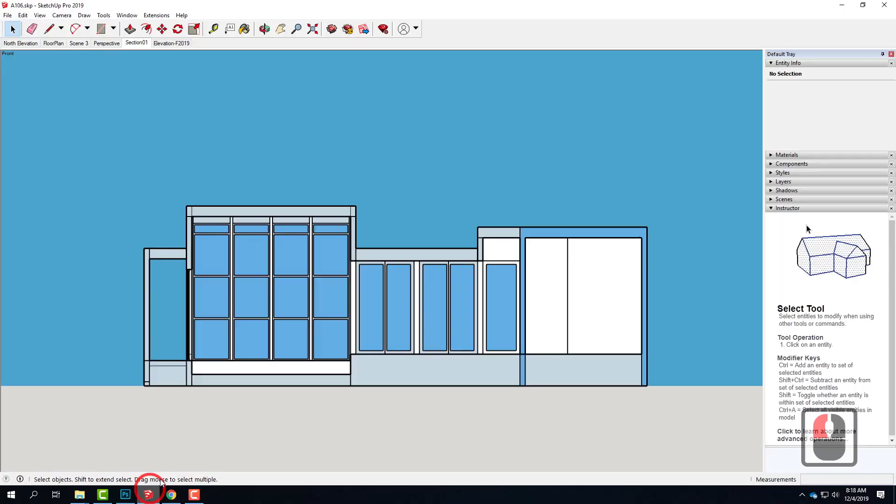So I'll do this a couple times with a couple different images just so you can kind of see how it works. In this scenario, we want to find the image first, or take the image if we went to the site, and then go to our SketchUp file. Let me switch into one of the perspective modes here.

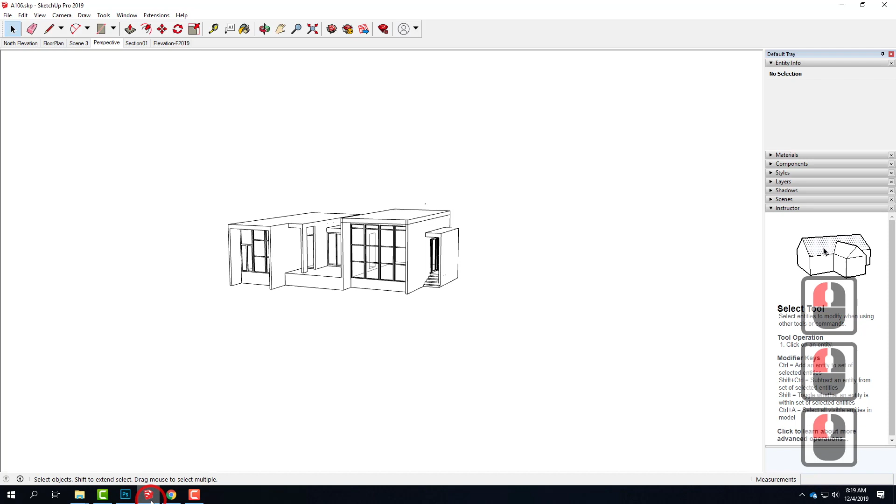All right, so I'm in perspective mode. I'm going to go into camera, make sure that I'm set for perspective. That's good. And I need to think about what this is going to look like in relation to the image that I have. So you end up flipping back and forth. There's my image, there's my SketchUp, and I'm going to go back and forth as I work through what they would look like.

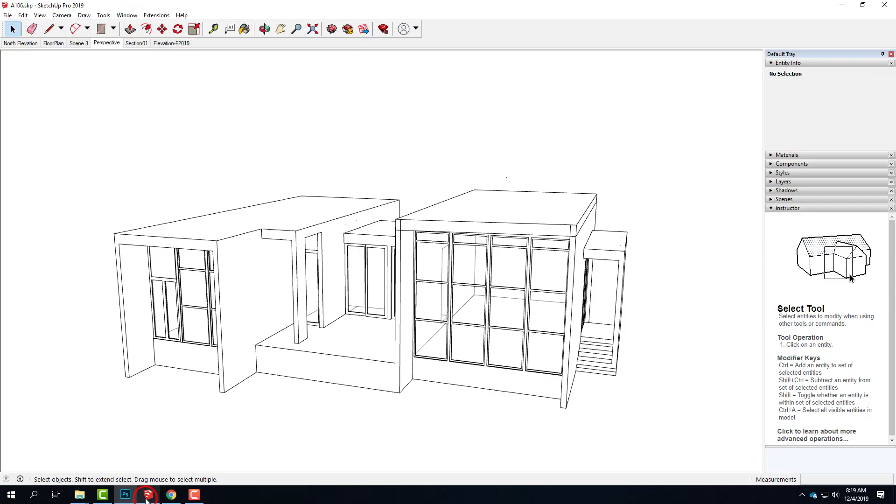Now the problem with SketchUp is frequently people take a perspective that's too high. They look at the building like this, and when they go to put it into their scene, it doesn't match up. The eye line doesn't match up. So it's really important to get yourself down into the correct eye line such that the horizon line is in the right spot. SketchUp has a built-in tool that can help you with that.

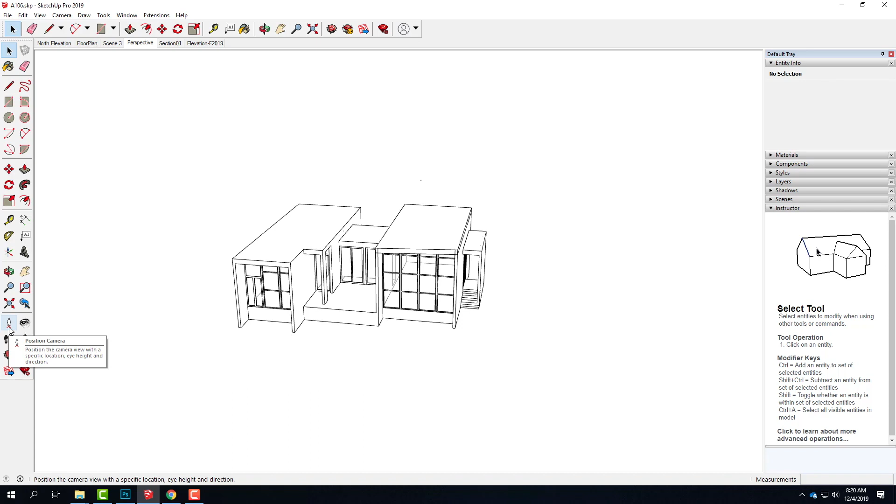It's available in the large tool set. So if I went to my View menu, and I went to Toolbars, and I checked the large tool set option, down here they have a position camera tool. It's a little person with an X below it. What that position camera tool does is if you click on it, it allows you to say, if I was standing here looking at the building, what would it look like? It kind of forces you down to an eye level perspective, which is a really nice way of looking at it. Right after you use that position camera tool, you get this little eye tool, which is the look around tool. That can help you orient your building to the site, etc.

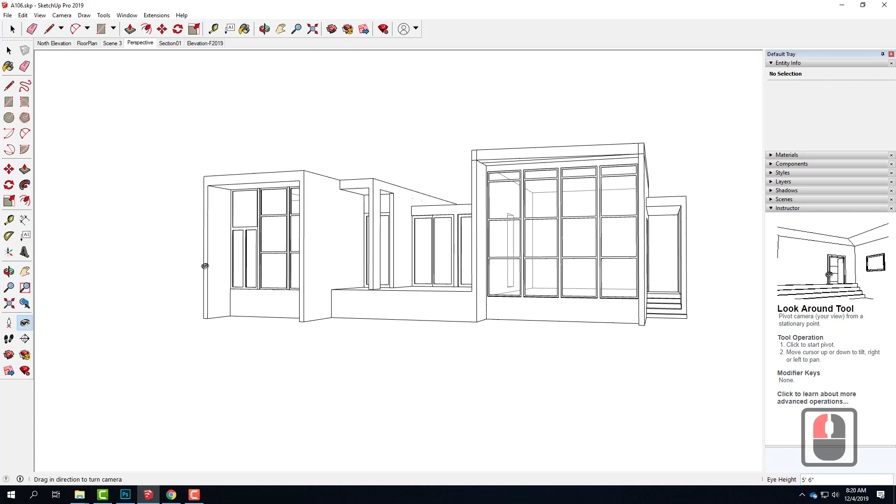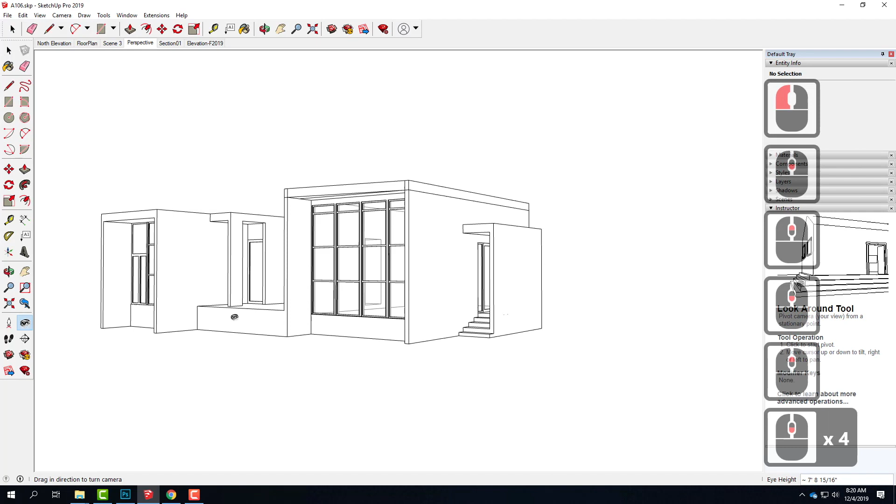So as I'm looking at this here, and I go to look at my building, okay, I'm a little bit further away if I wanted it to be parallel kind of in there. So I'd have to come back, maybe zoom out a little bit, zoom over a little bit, maybe. There you go. So you kind of have to keep working at it a bit to get where that feels about right. So somewhere right about in there, and you can flip back and forth. So that feels about right. It feels like it would sit into the scene about right. My eye level feels about right.

Oops, sorry, wrong one. It needs to be down just a little bit more. Maybe about there. So I tend to just flip back and forth like this until I feel like, okay, that feels like it would sit in about the right perspective.

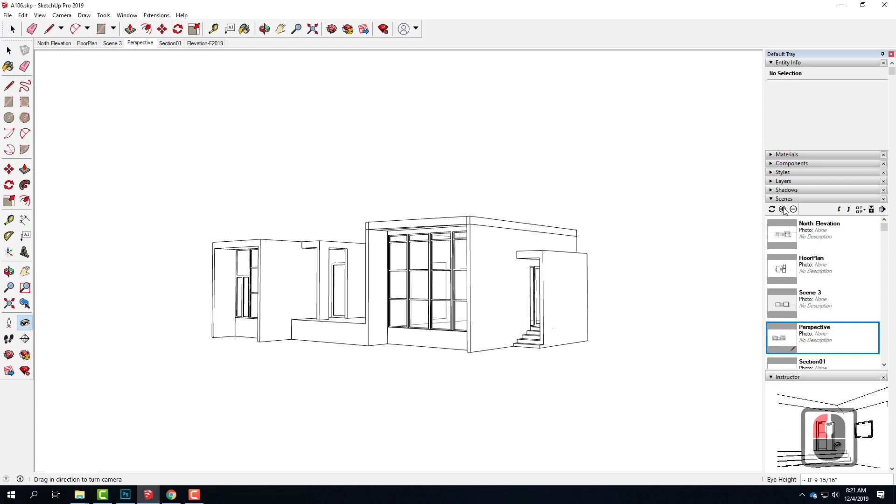At that point, I'm going to take the scene here, and I'm going to save the scene. I'm going to rename this particular scene to be perspective 2. That way I can come back to it. I would do the same thing for one of the other views. Of course, you only have to do this once.

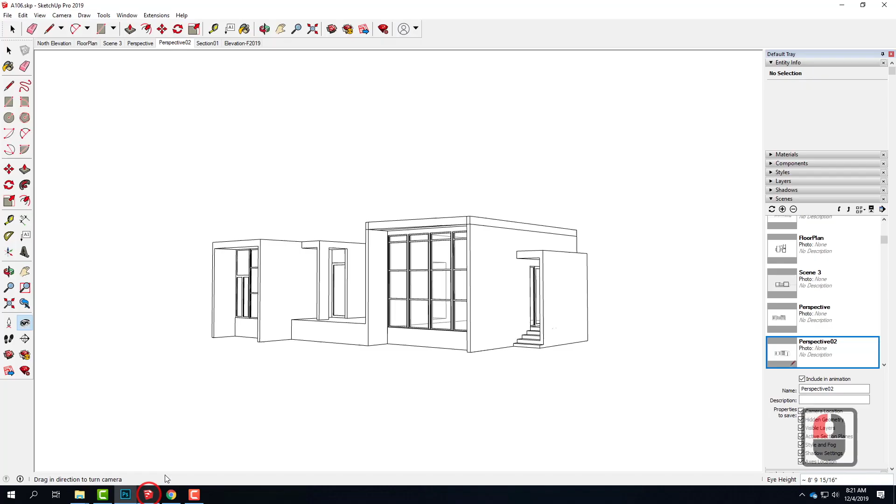But let's say I was working with this particular image, and I wanted to align it to the path. That perspective is going to be different. So in this case, it might even help to get yourself out a little bit. Use that position camera tool again. Position the camera, say right about there. Use the look around.

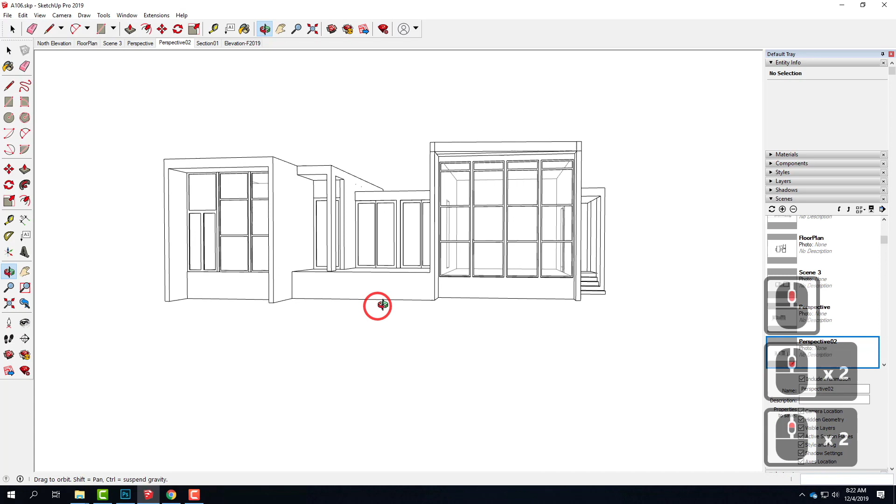Something like that. Nope, I'm too far over. So we'll orbit the model a bit. Maybe like that. I'm thinking about where that path is and how that's going to line up with this path here. So I'm constantly going back and forth trying to sort that out.

You know, it looks like maybe this needs to go down just a bit. Go back to that look around tool. Sink that just a little bit. And so maybe it's about there that it needs to be.

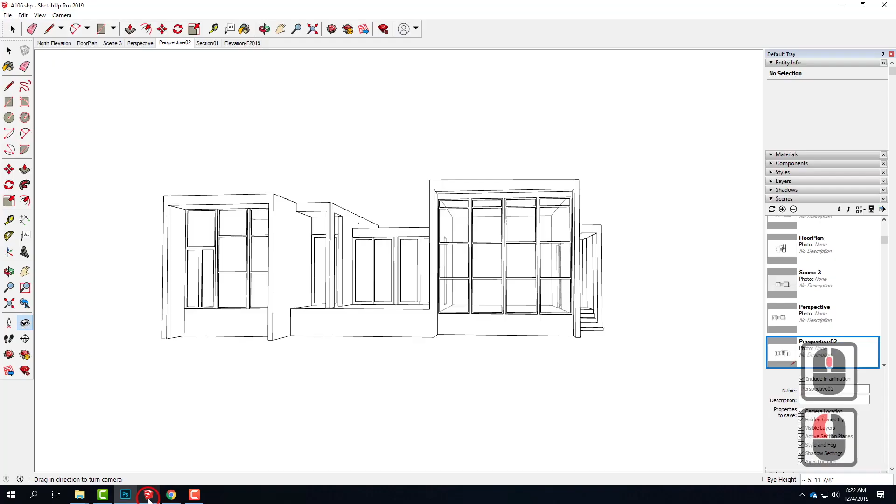So at this point, I'll go ahead and save this scene again. And we'll call this perspective 3. And so I'll go ahead and export the lines and I'll see what they look like in the scene to check if the perspective lines up correctly. So this first one, I would go to File and then Export 2D Graphic. Let me get to my folder for today.

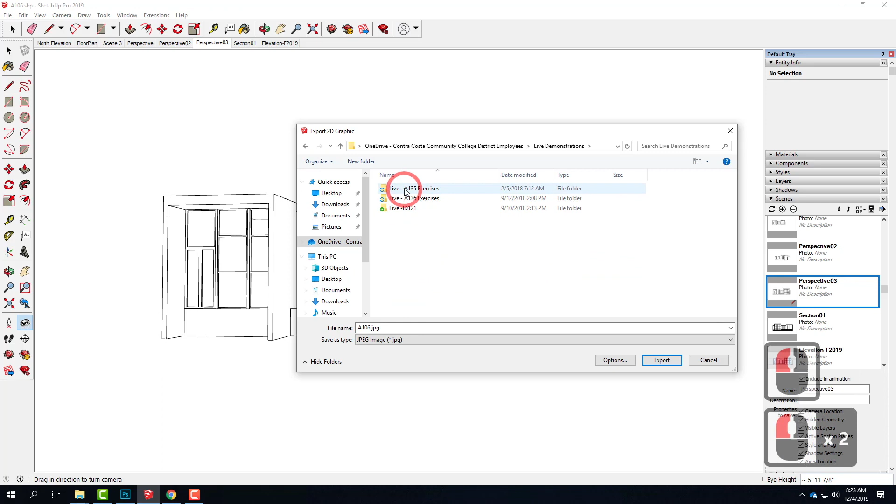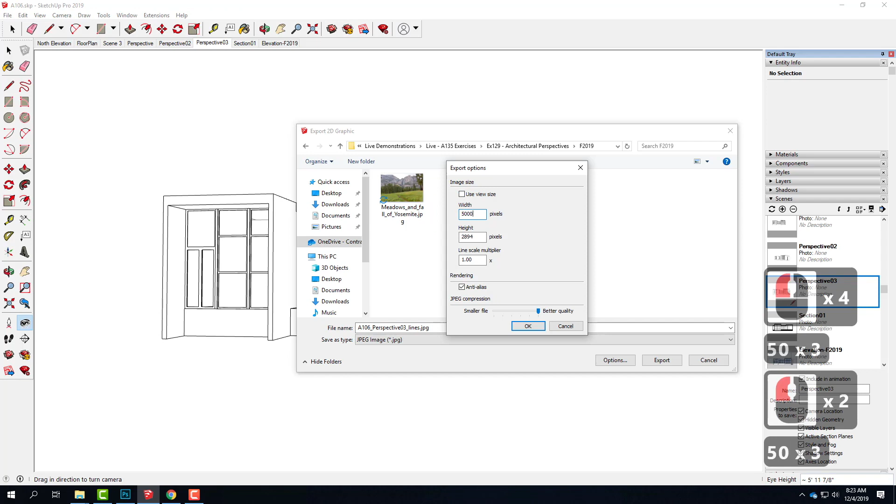I'll call it perspective 3 lines. Under my options, I'm going to change my size. We'll go up to 5,000. Oops, uncheck the use view size.

There we go, and I'll go ahead and say OK. And then export. I'll then jump back over into Photoshop. Here's my image. I'll go to File and then Place Embedded.

I'll take that perspective and place it in the scene here. I may temporarily make it transparent, so I might adjust this opacity down so I can see through to my building. The other option would be to change the blending mode so we see it there. This is a little harder to see, so I'm going to use normal with some opacity because I think you'll have an easier time seeing it on screen.

Then it's a matter of positioning the building, saying okay, there it is, lining up on the stairs. It looks like the stairs kind of come through. All right, that feels about right in position. The size is about right. Let me switch this.

We'll commit to it, and then I'm going to take this layer here and go to multiply. It's a little hard to see until I cut it out. Let me go back to normal so you can see it.

So I can start working with this, I can start cutting it out. I need to obviously do the mask, etc. And I'll come back, but this perspective seems appropriate for the scene. It seems to fit. Now on this other one that I was working with, we'll check and see how that one plays out.

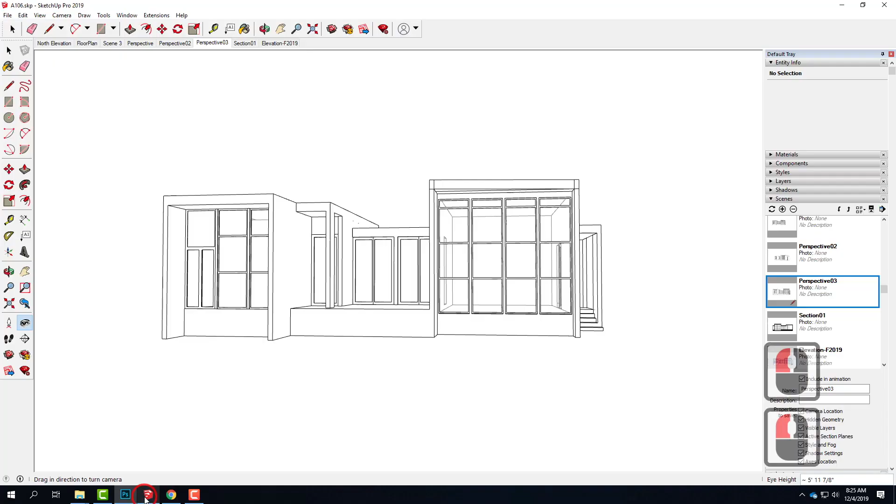That's why I have these scenes saved, so it's easy to jump between the two scenes as I decide which one looks right. So on this one, I'll go to File and Export 2D Graphic. This was perspective 2 lines, and I already have it set at 5,000, so we'll go ahead and export it.

I'll jump back into Photoshop here. I'll go to File and then Place Embedded. Perspective 2. Let me adjust that opacity here, and we'll pull this one down.

It would probably work, but I don't think it's as good, and I don't think it's lined up. I think the building has to twist just a little bit more. It might also have to be a little bigger. Oops, I always forget and hold down Shift here. Let's make that a little bigger.

Tuck that in. I think because of the hillside, this one gets a little tricky. It looks a little too high here, and a little too big there. So it's not quite the right perspective, but this is part of the challenge. That's why I wanted you to see me work through this to decide which one's right. I'm going to stick with this one because it lined up pretty well, as opposed to this one, which didn't quite line up as well as I wanted.

So now here's the trick. On this one here, you already saw that I brought this in. Lining this up with the other exports is going to be a bit challenging. So I'm actually going to go back to opening the lines version, and then I'll bring in the background the way we've done it with the other ones. So let me go back to my SketchUp.

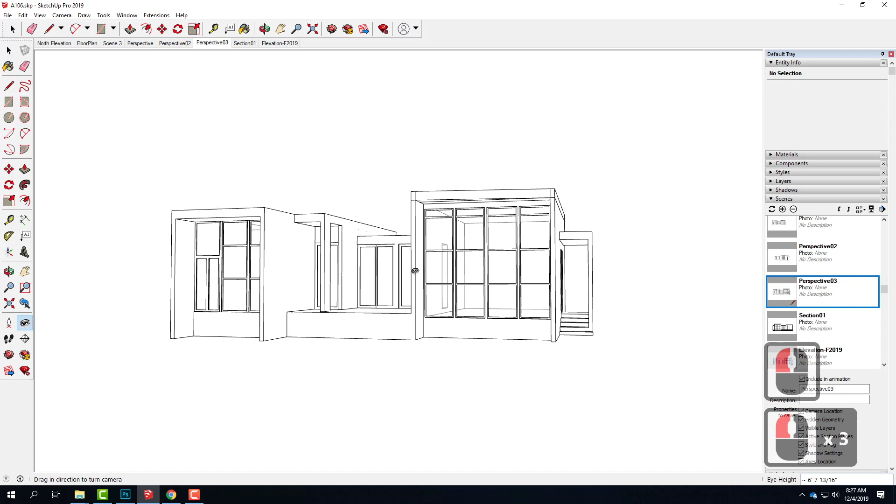I'm going to make all my exports. I'll go to perspective 3 because that's the one I'm going to end up working with. I'll go to File, let's see here. We need to turn on—we'll take a look at the X-ray view and see if that is good.

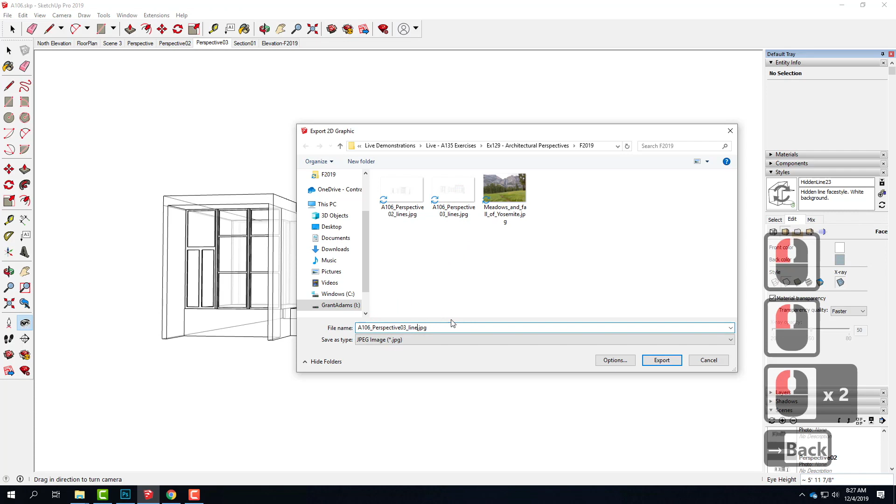Let me go to Edit, Face settings, we'll go to X-ray. Yeah, it might be okay. I'll export it anyway. I'll go to File, Export 2D Graphic. Wait, this was perspective 3, and this was X-ray, and so we'll export that.

I'll turn off the X-ray. Now I'm going to turn on the shadows. So I'll go to View, and then check the box for shadows here. I may adjust the shadows, time of day and time of year here.

So let's see, here's shadows, time of day, time of year. The temptation is always to make this look the best that you can, but in reality, we need to go back to our scene here and take a look at the shadows.

Where are the shadows? This is a pretty high noon setup, so the shadows would be pretty vertical. It also appears, yeah, we can look right there—there's a shadow on that side. So there'd not be too much in the world of shadows for us to see in here. We're actually seeing a lot more shadows than we really need to see. Let's see if I can adjust that a little bit. It's going to be about that angle, and we'll go back a little bit.

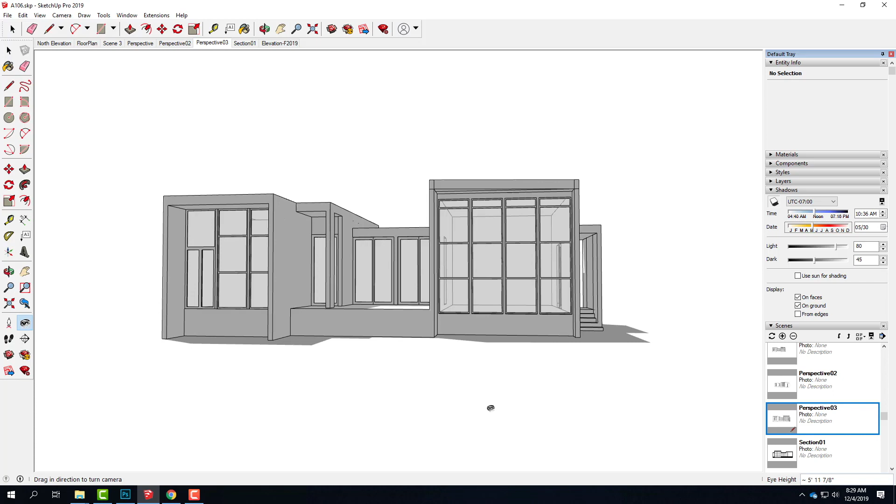All right, I'm just sorting through. We might be getting a little too much shadow here, but it'll probably work. The alternative would be to change the orientation of the building and rotate it around, but I don't want to go through with that right now.

So I'll export the shadows, but before that I want to make sure on my styles, I'll go to the edge settings and turn off edges so I get just the shadows. With just the shadows selected, I'll go to File and then Export 2D Graphic. This is going to be the shadows, and we'll export that.

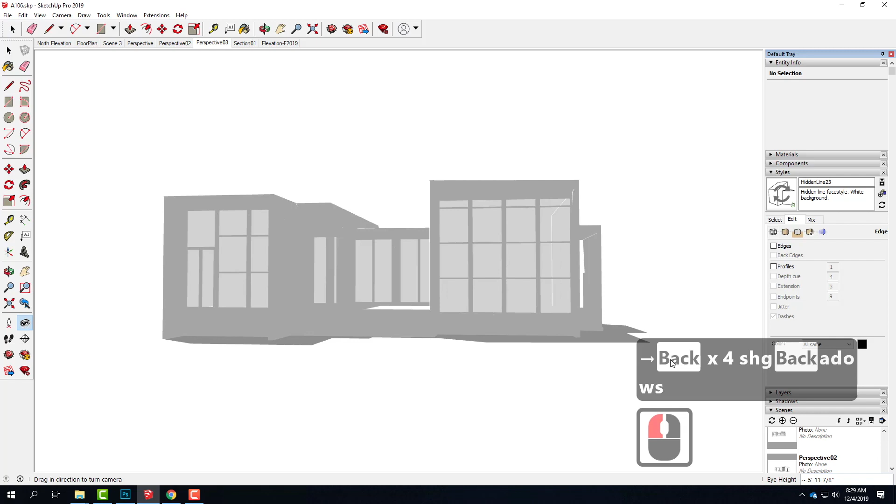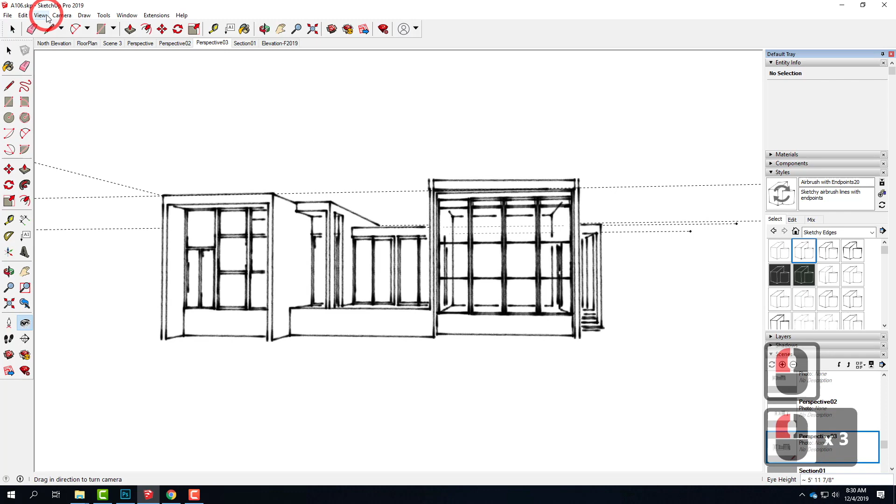We could turn back on our edges. I'm going to turn off the shadows, so I'll go to View and uncheck Shadows. Then I'll go into my styles and select the sketchy edge styles, using the airbrush with endpoints. I need to turn off my section cuts, section planes, section fill, and guides, so I have just the airbrush on. I'll go to File and then Export 2D Graphic.

And we'll call this one Airbrush.

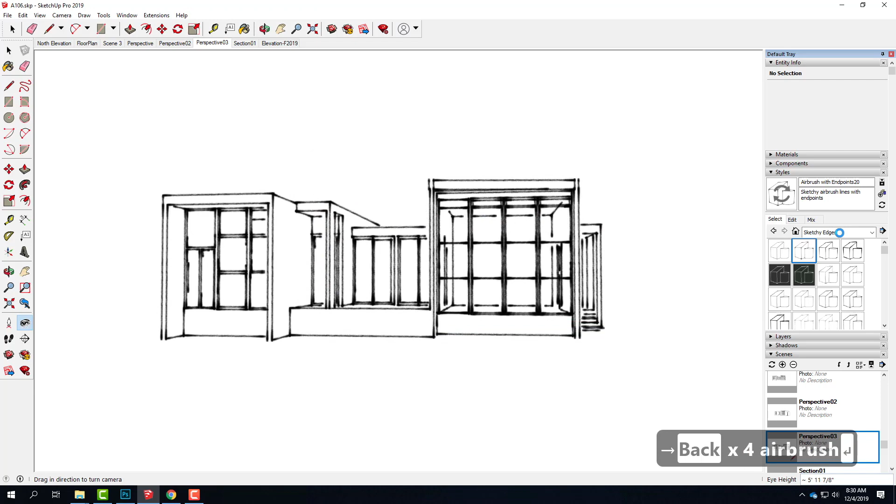And the last one that I did was the pen. Let's see if I can find it here. There's the pen gray. Actually, I had good luck last class with the pen black. So where's the pen black? There's pen black, a little bit darker.

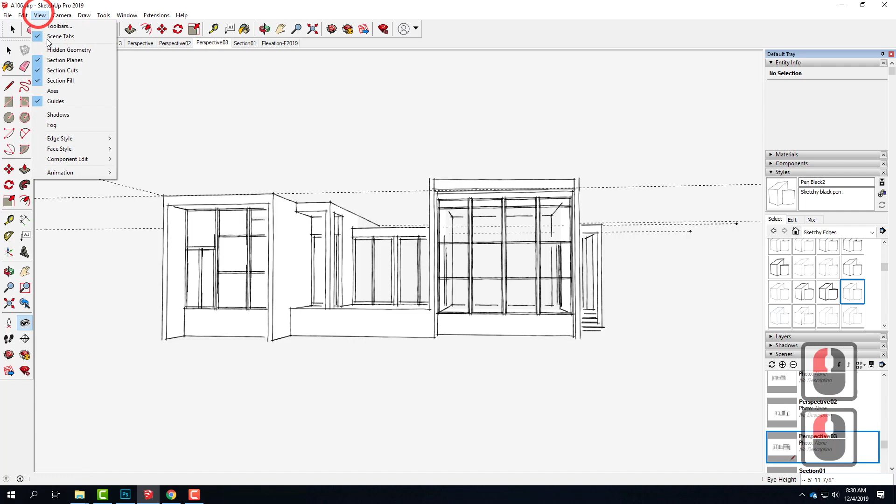I'm going to go to View and uncheck Section Cuts, Section Fill, Guides. There it is. I'll go to File and then Export 2D Graphic. And this one is going to be the lines. And then I'll export.

Oops, sorry, no, this is going to be the pen. Apparently I'm still asleep too. And then export.

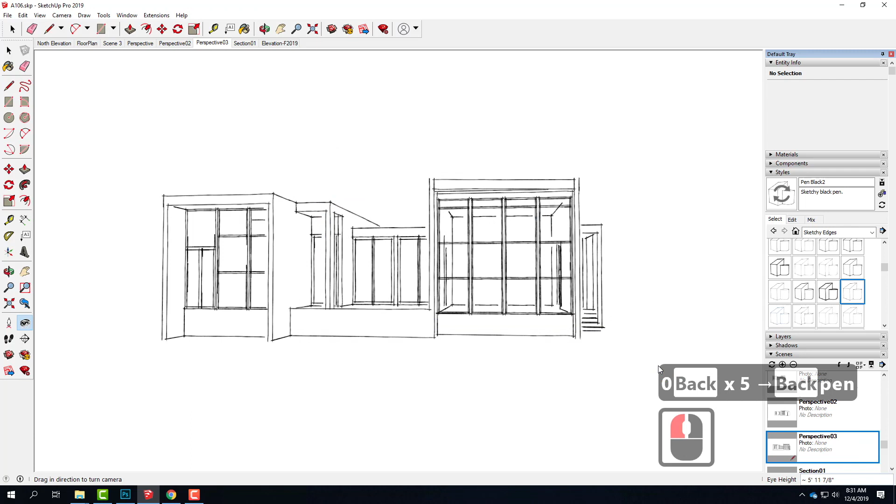Excellent, so I've done those exports. I'm going to jump back over into Photoshop. Remember, I'm not going to place them all into here because lining them all up is going to be challenging. Instead, I'm going to open the first one, which would be the lines version, and bring them all in here first.

So I'll go to File, Place Embedded, and bring each subsequent one in. The next one was the X-ray. We'll commit, File, Place Embedded. Next one was the shadows. Place, commit, File, Place Embedded. Let's see, next one was the airbrush. Commit, File, Place Embedded. And the last one was the pen. Perfect, so I have all of those in.

I'm going to change the blending modes on all of these. I'll hold down Shift, select them all, and change the blending modes to Multiply. Now we're seeing through and seeing the building as a whole with the shadows, etc. So I have that in place.

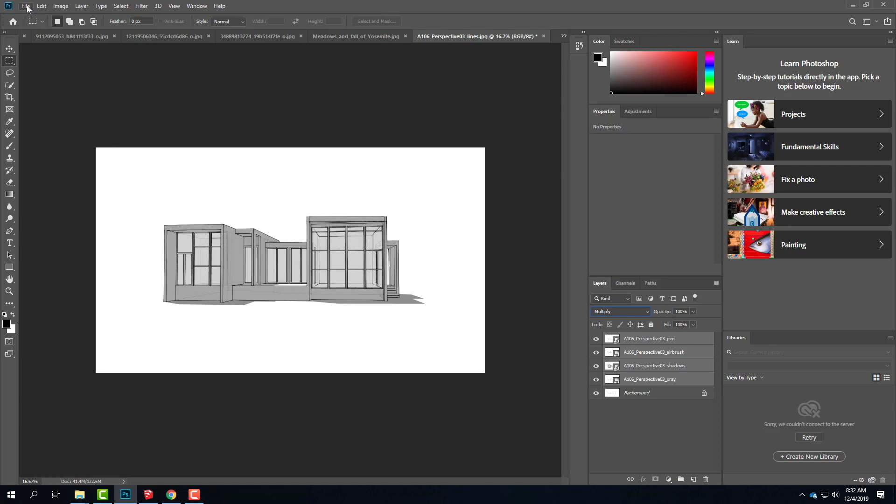Now I need to bring in that image. I'm probably going to need a larger canvas size, but we'll get to that in just a second. I'll go ahead and go to File and then Place Embedded, and this is going to be the background image. That was in one of my previous folders here.

Let's see, it was in last fall. Yep, there it is. We'll place this. Now this time I'm going to make this image large enough, so I'm kind of doing this in reverse order. I'm going to keep making this image bigger, and I might need to switch this into Multiply mode or even just change the opacity temporarily so we can see it.

I have to make sure that my path is going to line up with my building, so it's something about like that. Maybe this is a little bit larger here. All right, that seems pretty good. Call it right about there. I'll go ahead and commit to it.

Notice that I lost a lot of the image. So this is where I can go to Image and then Canvas Size. I'm going to peg this corner this time as my anchor because I don't need to get bigger there. And I'm going to make my height bigger and my width bigger so that I make sure I get the whole image.

I might need to make my width even a little bit bigger. So let me go back to Image and then Canvas Size. We'll put the anchor on the side here. We'll make my width 60, making sure I get everything.

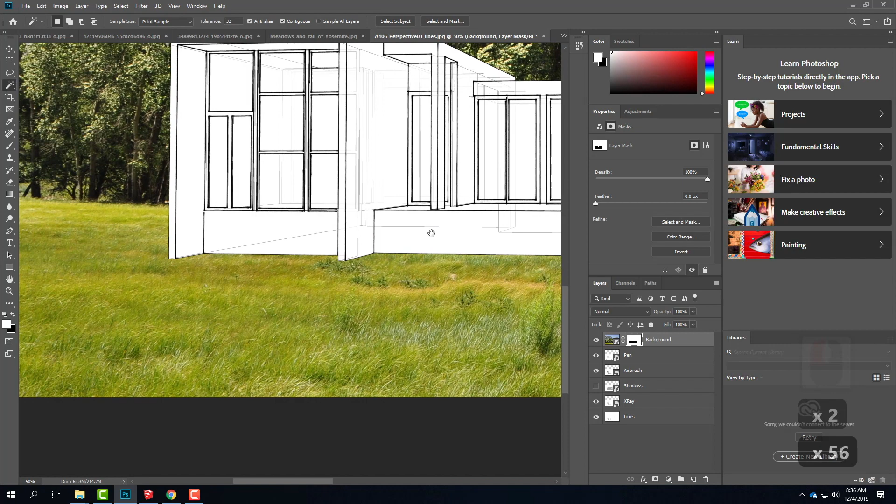But in the front here, we haven't dealt with how the grass overlaps the scene. Right now it's just a nice, stark, chopped line, so we want to make an adjustment there. I'm going to do that by copying a piece of the background to work with. We did this way back when, probably exercise 108 or 109 or something like that. Make sure I'm on the background here—we took and copied a piece of that background. There it is. I'll go to Edit, then Copy, then Edit, then Paste.

And it gives me just a piece of the background. If I were to turn everything else off, we'd see that there's just that piece of the background. I'm going to cut out that background piece—let me keep that one off for a second—for the part of the building that I need.

So let me use my Magic Wand tool. I'll select the outside—oops, on the lines there—I'll select the outside of my building. There it is. Then I'll go to Select, Inverse, so I've selected the inside of the building. I'll go to this piece and press the Delete key to cut that out. So what I'm left with here, if I turn off my lines for a second, is essentially a cutout piece of grass for where the edge of my building is. That's what I'm looking for.

We can now use the clone stamp to make that edge blend in a bit. So I'll use the clone stamp tool—let's hope today it works for me. I'm going to load in the legacy brushes, so I'll click on the little gear icon in brushes, and click on legacy brushes. Under legacy brushes, it's going to be under the default, about halfway down is going to be the grass brush. There it is—I'm going to select that grass brush.

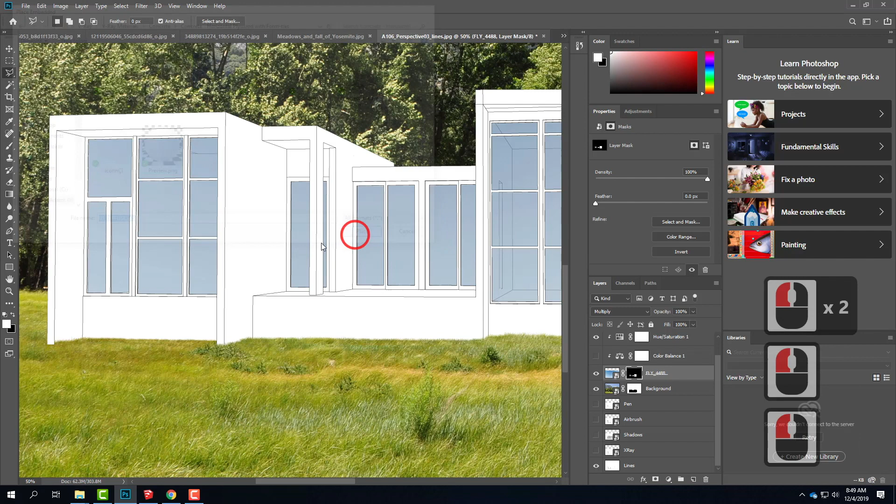There we go, let me zoom out just a little bit. And I'm going to adjust the size, and I want to get about 4.5, something like that, it's probably right about there. I'm lining this up on that edge, like that. I'll go ahead and commit to it. I want one more just in case, although that probably will be big enough.

You want to collage in however much you think you're going to need. But then with this, I'm going to change the opacity a bit so that you can see it. But then I'm going to skew this so it matches up with the vanishing points. So I'll go ahead and go to my skew tool, go to Edit, Transform, and then Skew. And I'm going to deliberately pull this down and back, and up and back. And as I start to work with this, let me make this a little bit more opaque so you can see it better.

There we go, something like that. You see, I'm trying to match up these lines with my building itself. So this ends up needing to come down a little bit and back a little bit, and over a little bit like that. Yep, that's pretty close.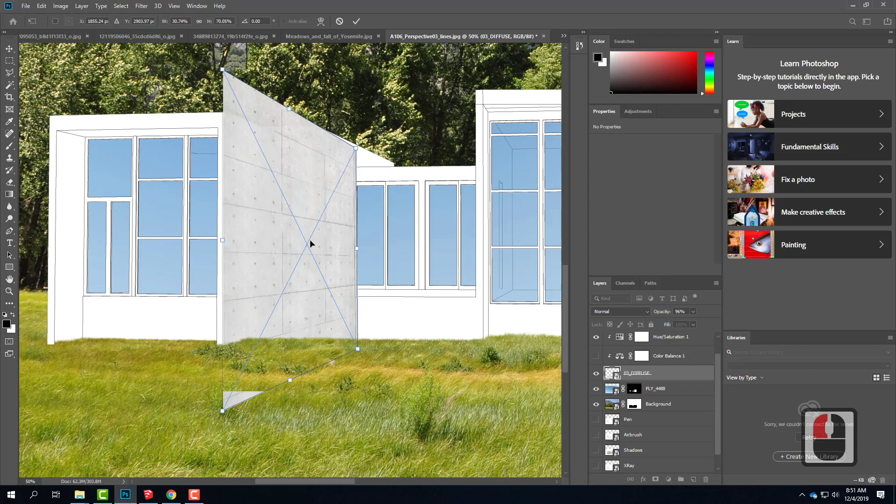So once I have this set up in perspective, I can then commit to it. I can use my lines layer and my magic wand to select that edge. And then I can go back on my concrete layer, click Add Layer Mask, and it's going to cut out the material such that it fits in perspective on that wall. You guys see how I did that?

So it takes a lot of work to apply materials to the walls because I would need to do that material here, and here, and each time it's a different skew, a different perspective to get it to fit. So there's lots of individual little material applications.

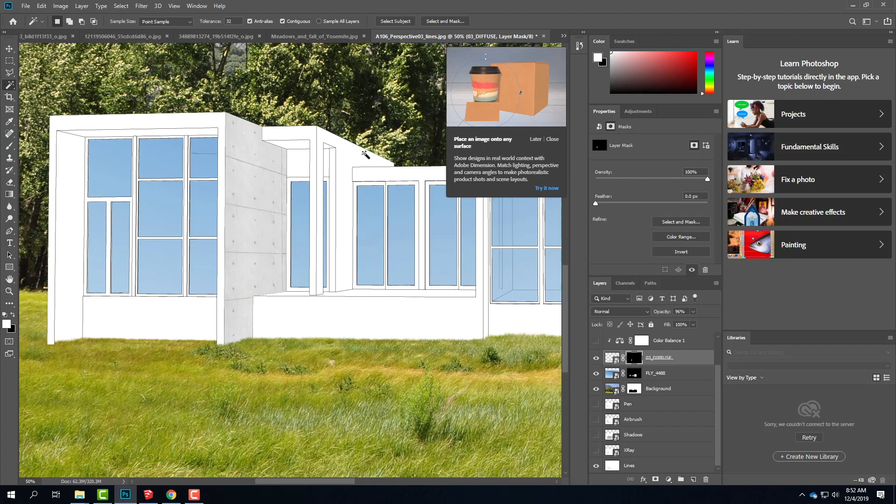If I did it on this section right here, I would do the same thing. I'd go to File and then Place Embedded, and place that in. I again have to think about the overall size. I can use my edge here as a cue because it's about the same size—it might be slightly smaller because it's slightly further away.

Start to get that one committed. There we go. Then we'll go into my skew again—I'll go to Transform and then Skew. I know I'm going to need to shorten that up a bit, and then this is going to have to go into perspective.

Sometimes switching so that your opacity comes down will help you line things up. So I want to make sure that I am there—it looks like I'm not quite at the correct perspective yet. That looks a little bit better. Judging the bottom is always a little bit harder. Looks like it's more like that. This needs to go up a little bit more, like that. Okay, that feels pretty good there.

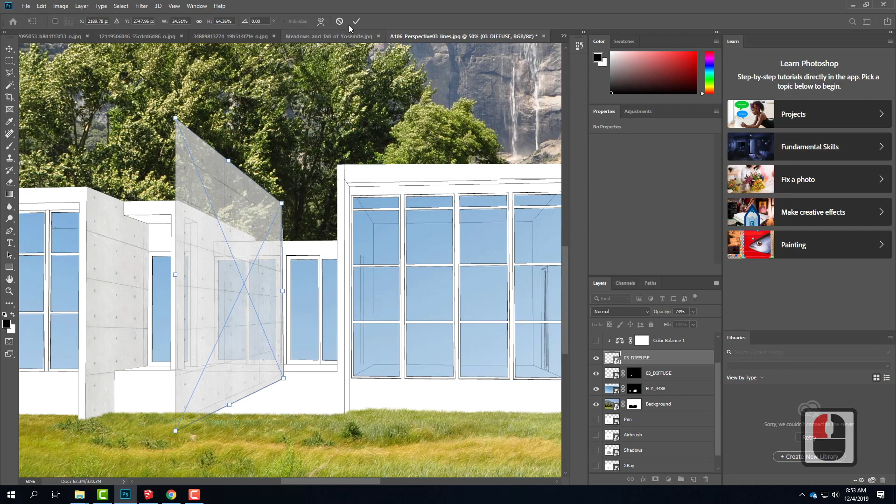I'll commit to it. And then same thing, using my lines layer, I'll use the magic wand to select that wall. I'll come back up to my texture, click on Add Layer Mask, and that cuts it out for that wall. Did you guys see how I went through that process? It takes a little bit of time to get it right and get used to it.

But that's essentially how you fake materials in perspective—you take the flat material and use Skew to get it to go into perspective, and that's how you apply materials to your building. In my case, I don't know that it's necessarily the most important thing to do, but I wanted to at least point it out so you guys were aware of how to apply that material.

I have the option here to switch those materials into multiply mode. So I could select both of those and turn them into multiply—it lets the lines show through a little bit more. It's a matter of personal preference.

At this point, it would also be a good idea to throw in some people for scale. I'd go to File and then Place Embedded. In this scenario, if you go back to that lecture we did earlier in the semester, we're using the same strategy here where we go find the people and bring them into the scene.

So let's go into my resources—there's my people. In this example, I could use the color person, the silhouette, or the black and white version, depending on what you're looking for. I'm going to go ahead with the color version. I'll click Place. Now the sun is on this side, which is a bit of a problem, so I want to flip it to the other side.

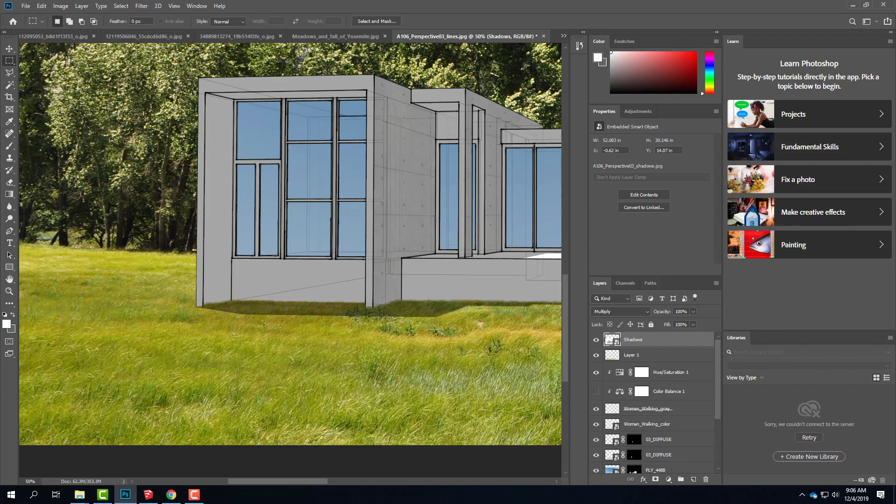If I were going to keep those shadows, I would need to come in here and do the grass brush in white right along that outermost edge so it would feel like it belonged in the grass. I would come along here with that same white. When I got to this, it would be sharp across the path, but it would have a little jump around that curb, and then continue with white along this edge. It would be gray along that edge, white along this edge, gray along that edge, and gray along the back, so it would take a little bit of integration. I don't want to make you watch me do that again since I just did it with the other shadow—you guys get the idea.

The last thing you may or may not want to do—I did this briefly on the other one—I'm going to turn off the shadows for right now and leave it standing out like this. You might want to add those birds, so I could load in that bird brush again. It was a simple Google search to find it.

There it is. Let me extract it. Oops. I'll go back to Photoshop. To load it, I'd go to my presets—Edit, then Preset Manager. Sorry, it's File... actually, Edit, Presets, Preset Manager—I was correct the first time. Under Brushes, I'd click Load, go to my Downloads folder, which is where it was, load those brushes, and click Done. Then I go to the Paintbrush tool, and under my brushes here I'd come back up. We can close the legacy brushes. There's the birds, and I could pick one of the groupings of brushes or groupings of birds.